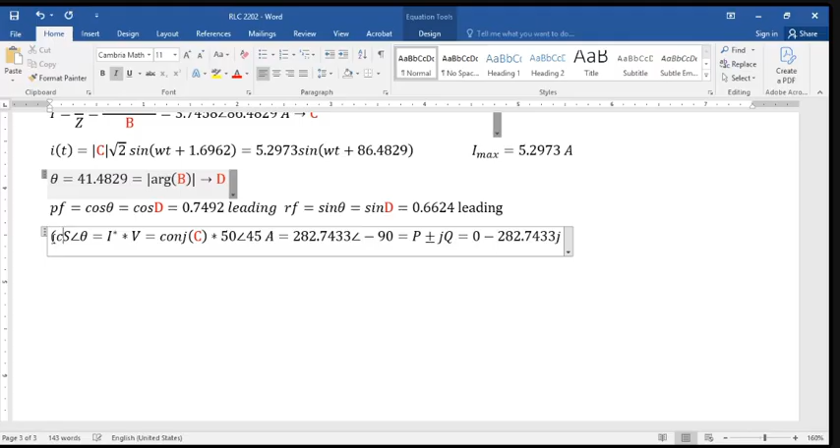So the conjugate of C times 50 angle 45. Lalabas 140.3076 minus 124.0592 i,

which is equal to 187.2883 angle negative 41.4829. Okay? So, makukuha nyo din dyan.

So, ibig sabihin, anong S natin? S is equals to 187.2883, ito ay VA. P is equals to 140.3076 watts. Q is equals to 124.0592 VAR.

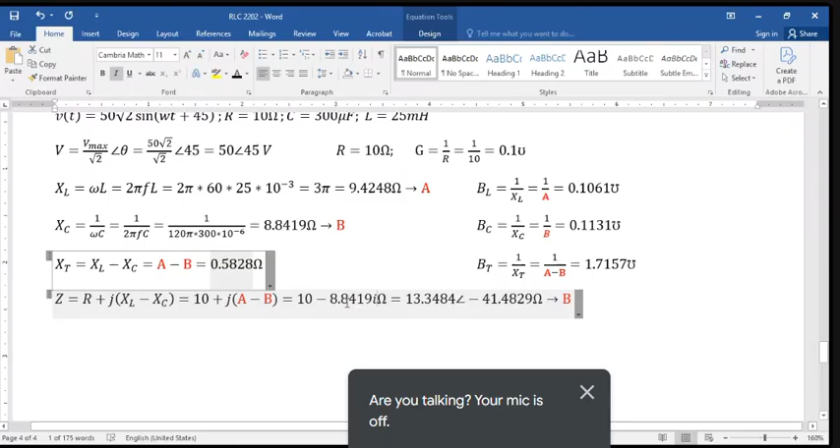Shift store C. So ano magiging value ng sunod natin? So 10 plus A minus B i. So 10 plus pala, sorry. Not 10 minus, but 10 plus. Shift store C. And 10.0170 pala, angle 3.3356. Okay? Shift store C yan ha.

Sunod. Siyempre Y, reciprocal ng impedance. Ano reciprocal ng impedance natin? 1 over Z. So Y is equals to 1 over Z, which is 1 over alpha C.

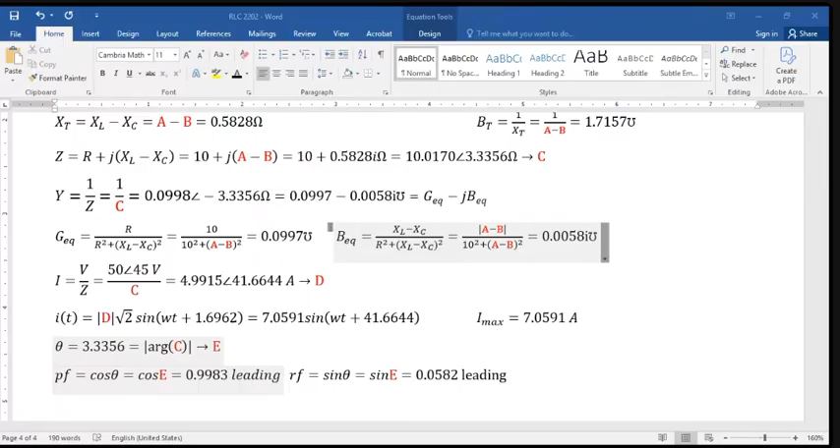The question is, leading or lagging? Kayo naman ang tatanungin ko. Leading kaya to o lagging? Based on your analysis. Anyone? Ano sinasabi ko pag leading at lagging? Buhay pa ba? Lagging. Miss Maderazo, ba't kaya lagging? Kasi po, mas malaki po yung XL kesa po sa XC. Correct. Positive siya, so siya ay inductive. At sinabi natin, basta inductive, lagging. So B, lagging.

So anong sunod natin sa ating solution? Kunin na natin si power. Current conjugate na tayo, para mabilis. So conjugate ni current, which is conjugate D times 50 bar angle 45. So lalabas 249.1536 plus 14.5216. Tapos magiging 249.5765 bar angle 3.3356.

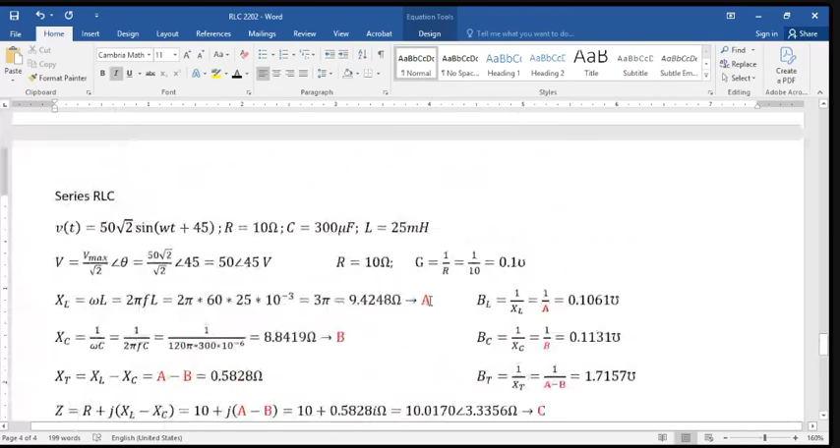So, ibig sabihin SPQ: S is equals to 249 VA. P is equals to 249.1536 watts. Q is equals to 14.5216 var. So sa SPQ, anong sunod? Eh di lalagyan natin ng VR, VL, VC. Dadagdagan lang natin to ng isa.

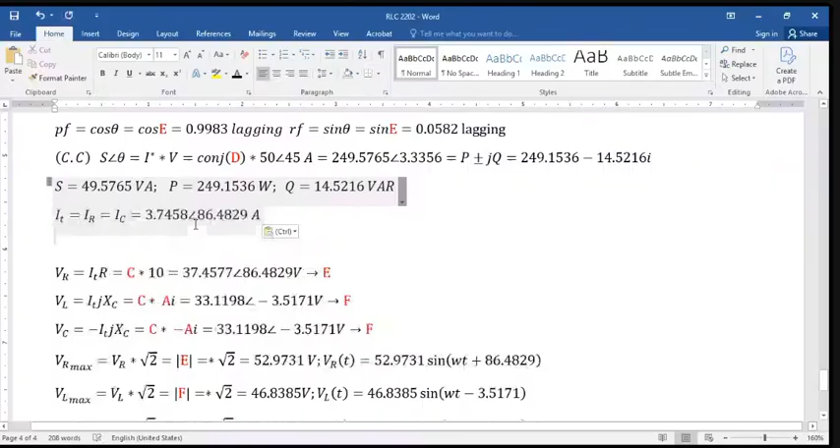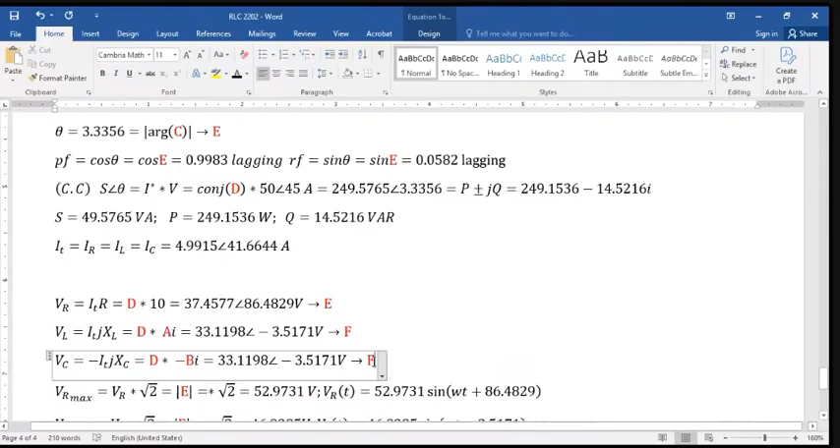VR, VL, VC. Paano i-solve? Bago yan, yung current muna. Total current is equals to IR, IL, IC, kasi series, equal ang current. Sa voltage, magiging alpha D na to. This would be XL, negative. Ine-edit ko na lang siya kasi wala naman pong nababago.

So alpha D times 10, shift store E. That would be 49.9153 bar angle 41.6644. Shift store E. Sunod, alpha D times AI para sa VL. That would be 47.0441 bar angle 131.6644. Shift store F. Sunod ay VC.

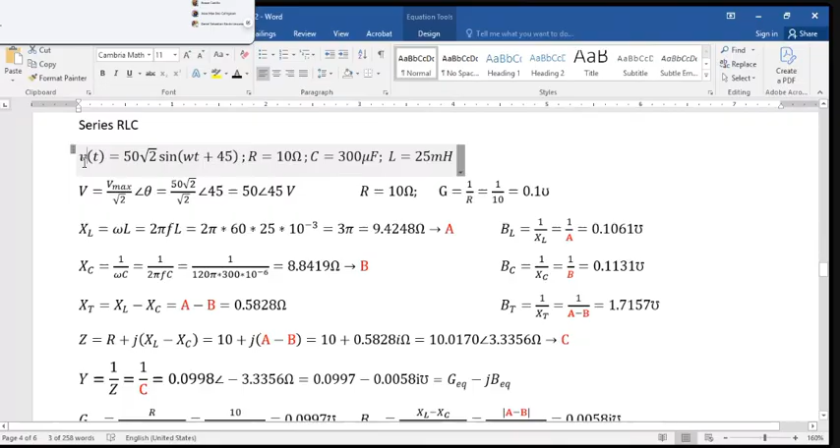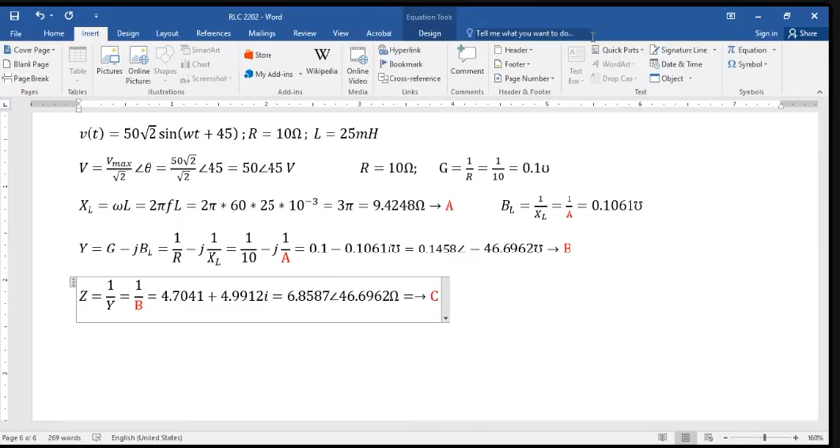Okay. Pero, di ba, equal din to saan? Yung sinasabi nating REQ plus jXEQ. So we could say that REQ is equals to G over G squared plus B squared. Which is equals to ito din. XEQ, papalitan lang din natin to ng B. For checking purposes. Okay?

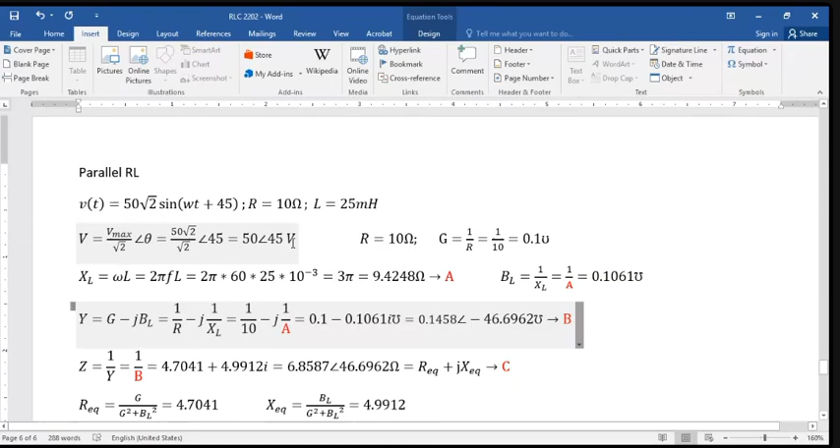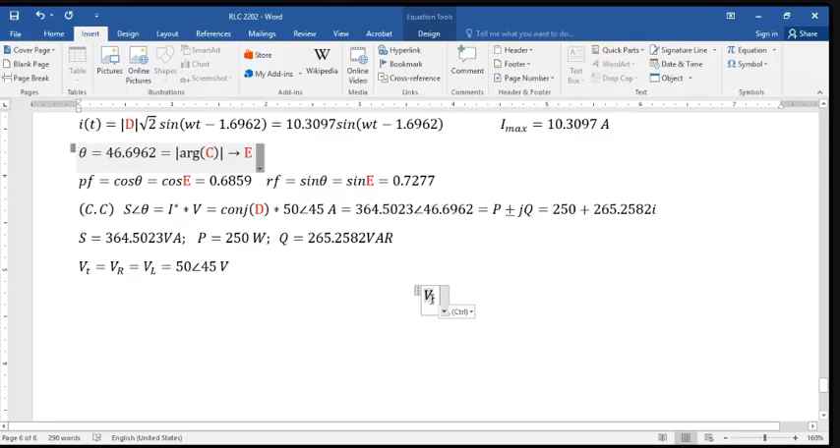Which is equals to 50 bar angle 45. Ngayon, ang current mo ngayon dito ang magiging summation. So dito, ang inyong I total is equals to IR plus IL. Ano ngayon natin kukunin yan? Alam din natin that the total current is equals to what? V over Z. So that is equals to V total over Z.

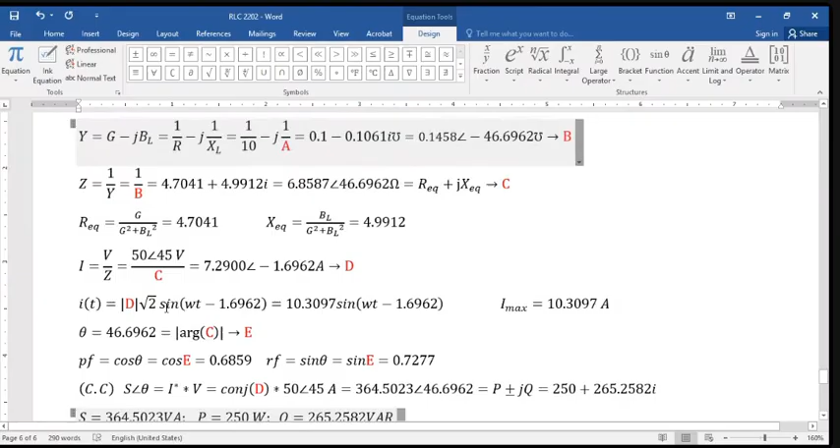Tama? Ano ba si Z? 1 over Z. Di ba yan ay magiging V total times, ang 1 over Z ay equal saan? Y. Di ba? Eh, ano ba si Y? G minus JBL. Di ba? So we could say that I total, kung dinistribute natin yan, ano magiging formula niyan? V total times G minus V total JBL.

Which is equals to, ano bang V total times G? Magiging V total over R. Diba? Ang negative J, pag nilipat mo sa baba, magiging positive. So magiging J, ang reciprocal ng BL ay XL. So magiging JXL. Ito ay V total pa. So ibig sabihin, IR is equals to V total over R, IL is equals to V total over JXL.

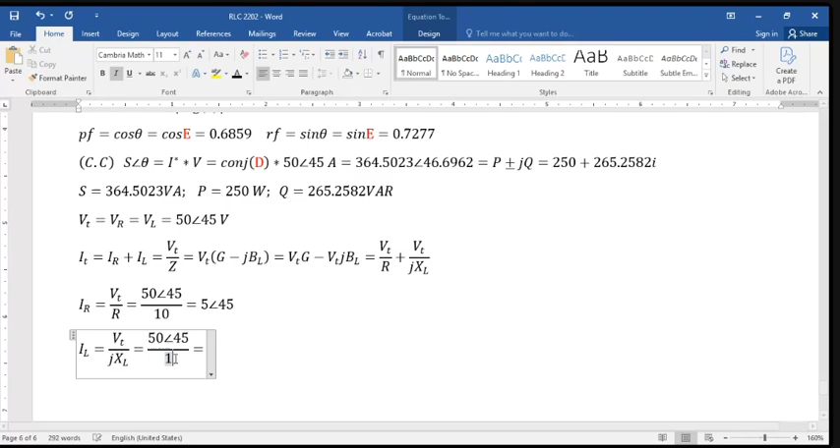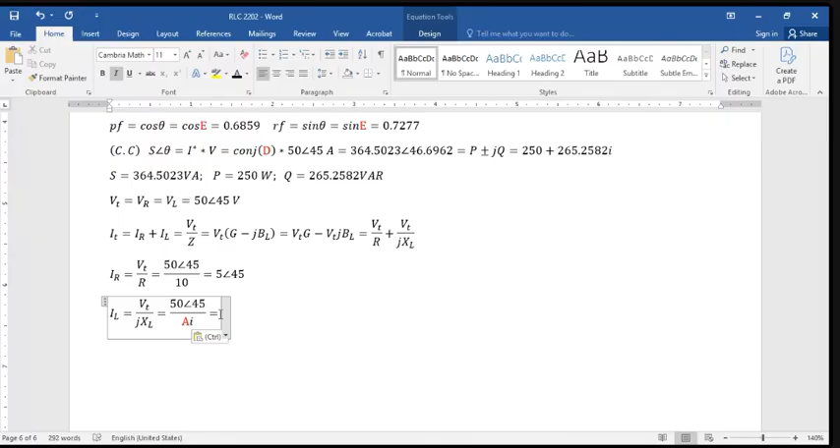Which is equals to 50 bar angle 45 divided by 10, which is equals to 5 bar angle 45. IL is equals to 50 bar angle 45 all over JXL, which is equals to 5.3052 bar angle negative 45. So yan, syempre, may instantaneous din yan. Di ba? IR, IL. Pwede natin itong i-store sa ano na store natin? Store F at store X. Okay.

So absolute F times square root of 2. So magiging 7.0711 ampere to ha. So this would be 7.0711 bar angle positive 45. Tapos, ito yung IR pala, sorry. Current nga pala tayo, no? So this is IR pala.